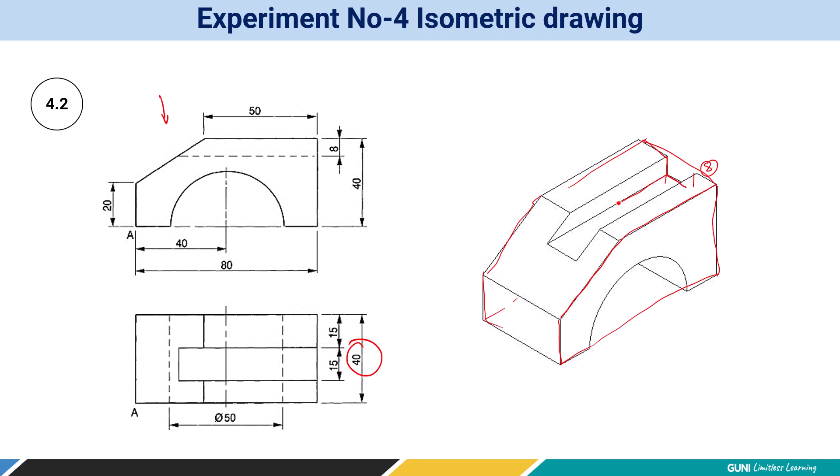Now from each corner I am going to draw a line like this, and from here like this. I will copy this line at this corner and this corner, so they will intersect at this point. Then I will trim away the additional part and connect this inclined surface.

After that I am going to draw this circle and trim out the remaining part, and lastly draw this line to finish this isometric drawing.

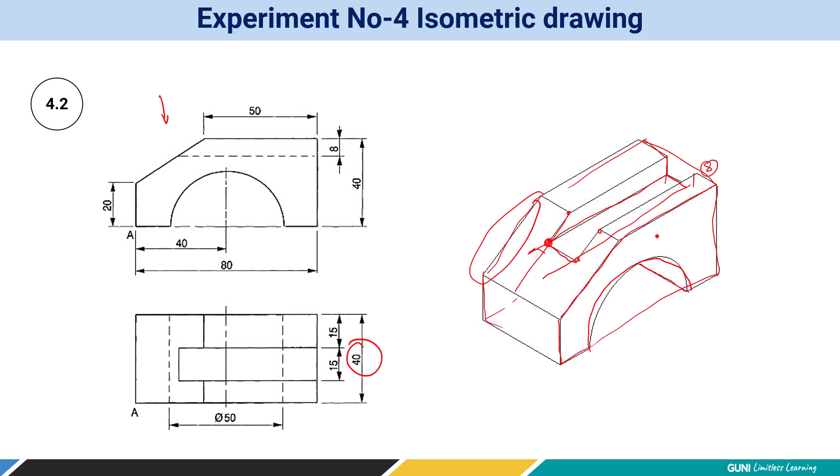So let's switch over to AutoCAD.

Now draw the line of 80 millimeter dimensions, vertically by 40, and here it is 50. Now I'll draw this line upward by 20 millimeter.

I'm trying to move all these 4 lines a little bit in this way so I can have space around it. Now let's copy this much part, and this will be my base point.

Now change the orientation to the front and take a dimension of 40 millimeter as given in the top view. Now let's try to join this part to this part, similarly this part to this part.

Now also let's delete this hidden part over here, and join this part from here to here. The idea is to create a basic framework so that we can draw the remaining part.

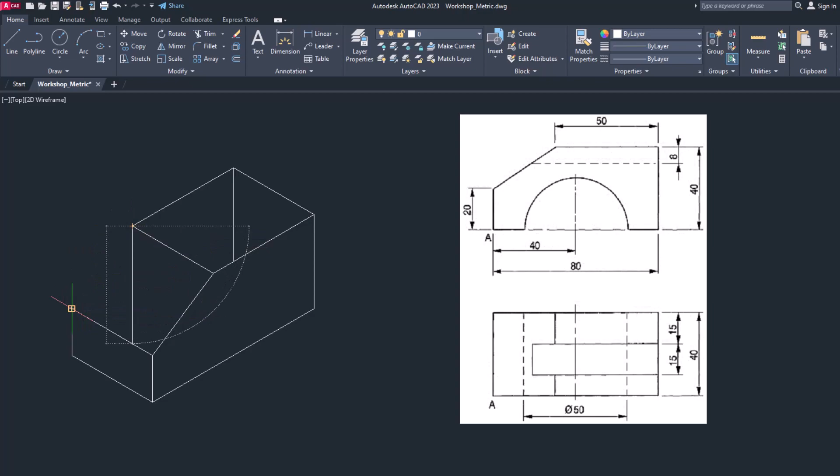Now let's draw the internal detail. Here I am going to delete this line and choose the line command, and at a distance of 15 millimeter I am going to draw.

Now I will switch over the isoplane to the right, and the depth will be 8 millimeter. Again I will switch over the isoplane by 15 millimeter dimensions, and upward will be 8 millimeter, and I will join over here.

Now let's try to draw the lines coming from each corner. So here it will be like this, from here like this, and from here like this, and similarly from this bottom corner.

Now also try to copy these inclined faces from here to here and here. Now I'm going to remove lines which are not visible in isometric.

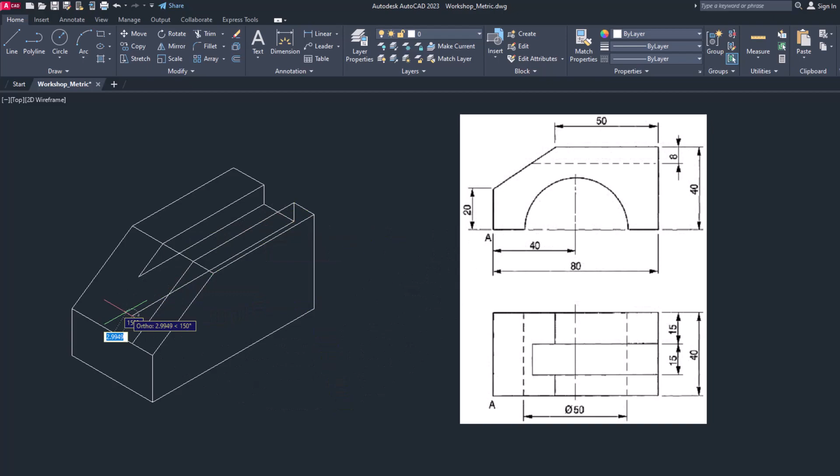I will also trim unnecessary parts like this, and this. I unnecessarily or by mistake deleted a line, so I have to keep it, extend that part, and remove this part.

Now let's draw this line again. Now I'm going to remove this middle part like this. Now let's remove this hidden line, and also remove this part and this part.

Now save your drawing. Now let's try to complete this circle part. So switch over to iso right plane, EL for ellipse, right click iso circle.

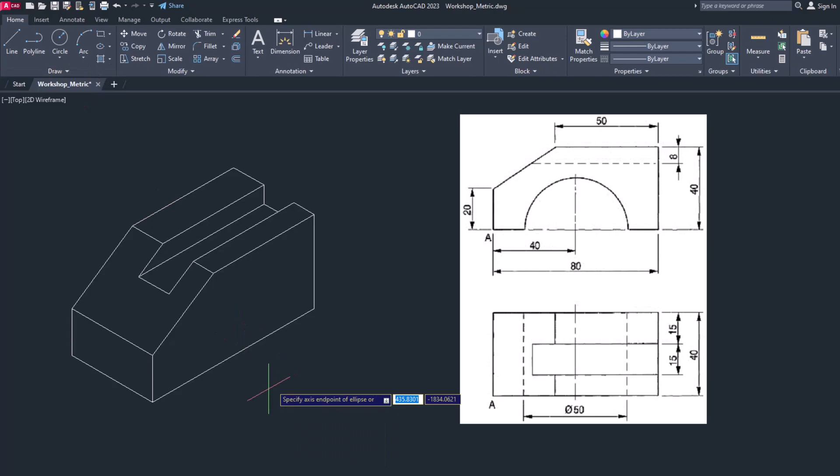From here it will be at 40 millimeter dimensions, so diameter is 50. Now let's delete the unnecessary part, this one and this one.

Now switch over to iso left and try to draw this line, zoom in and trim out the additional part.

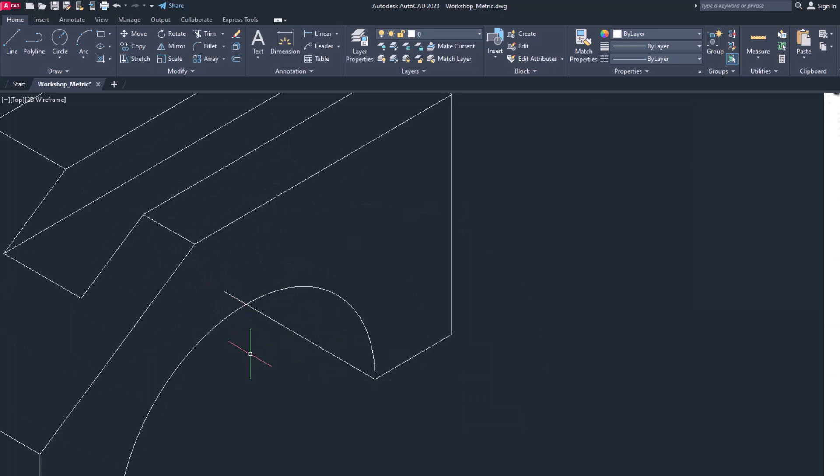So student, this is how you can create an isometric drawing of this given part.